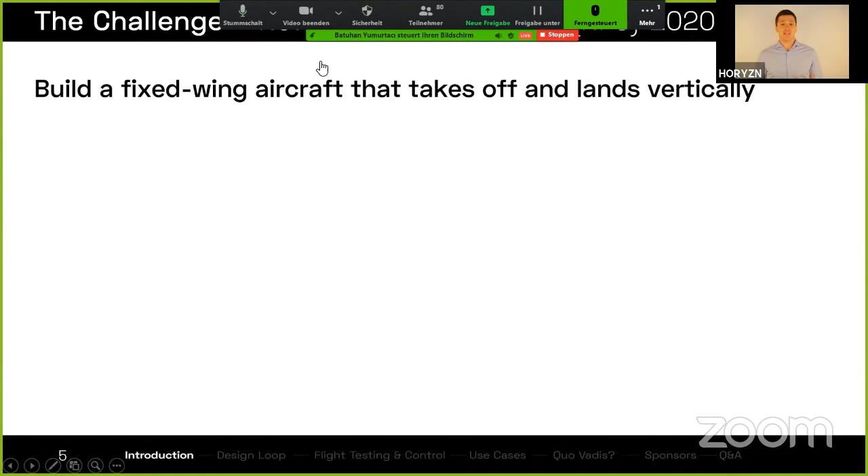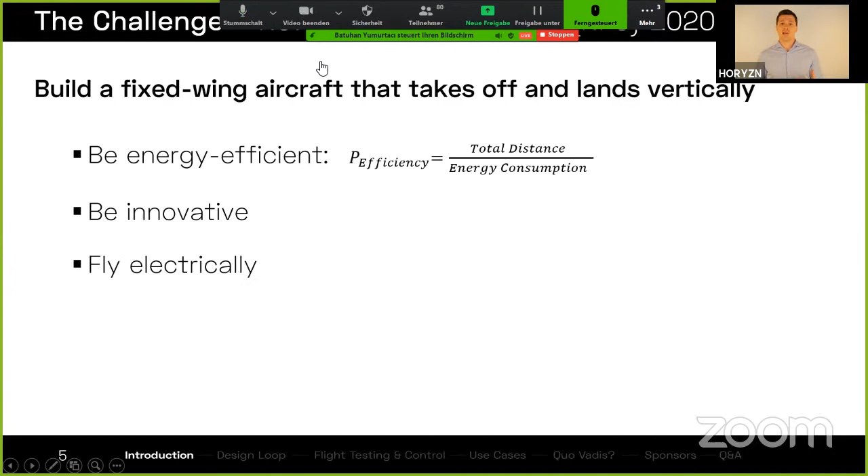Our story began about 8 months ago when we decided to participate in the NFC international competition. The task is to build a fixed-wing aircraft that is able to take off and land vertically. But our aircraft has to be energy efficient, and we get the most of our points for the flight performance - so the total distance divided by the energy consumption. We must also have an innovative design. We have to fly fully electric, and we must carry a 2-kilogram payload measuring about 1 meter. The competition will be taking place at the end of October.

The mission profile is quite challenging and includes taxiing, a 15-minute cruise flight with a minimum flight speed of 60 kilometers per hour, and also looping.

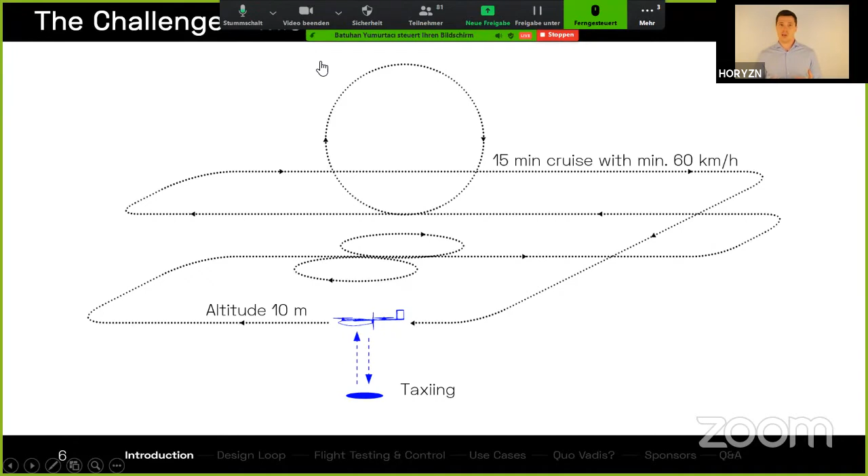So we put this team together. But who are we today? We are 29 bachelor, master, and PhD students. We are from 9 different nations. We are divided into 7 sub-teams. And we have one goal: to win the NFC competition.

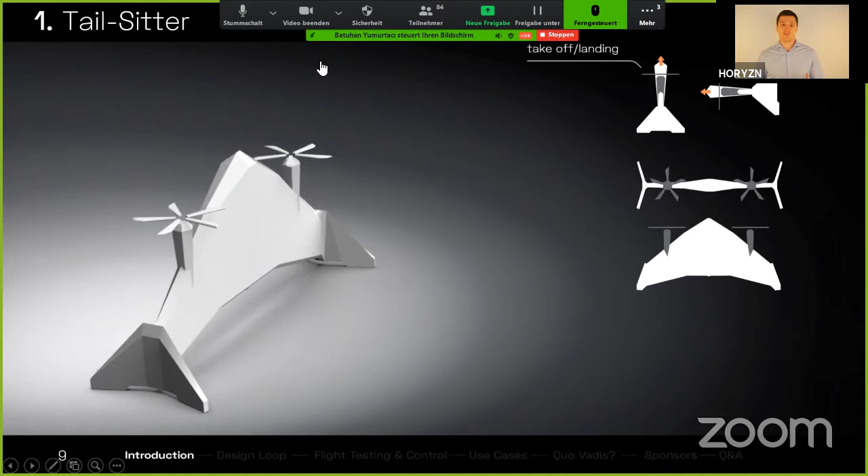So we started the brainstorming process to find an optimal configuration for our mission. We studied the following configurations: the tail-sitter, the tilt rotor, the kestrel, the tilt wing, the quad plane, and the quad plus tilt configuration.

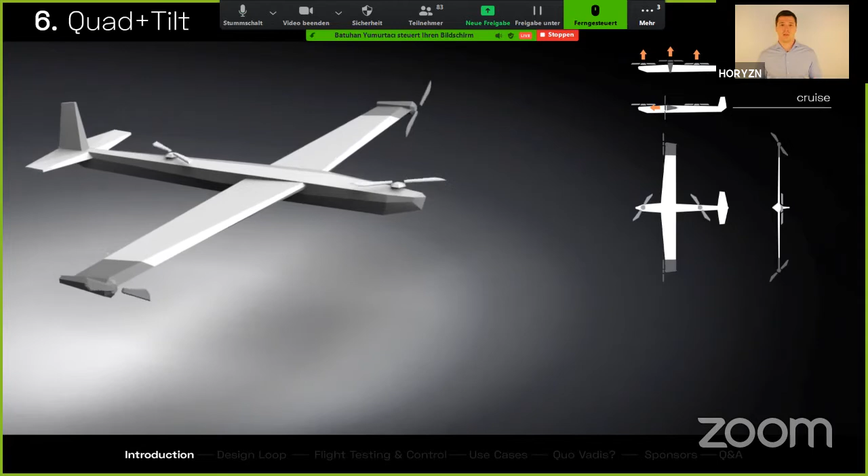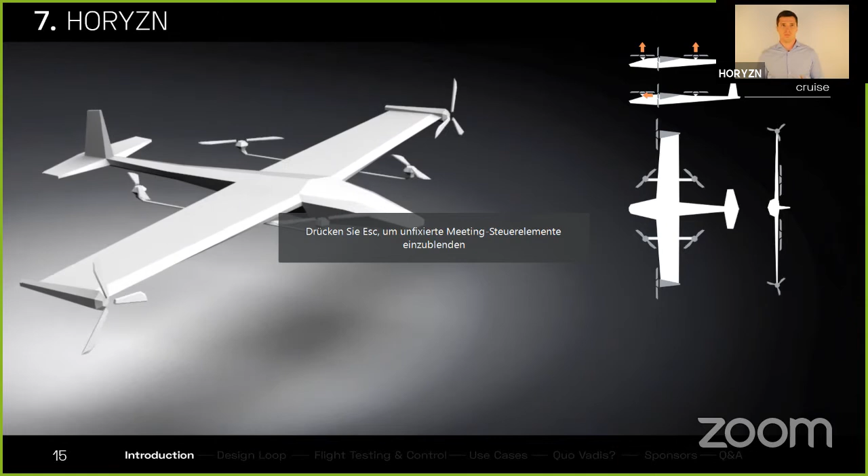From the quad plane and the quad plus tilt configuration, we derived the final concept. I'm proud to say that we finally found a configuration that we called Horyzn. Horyzn is derived from its design goal to be ultra efficient.

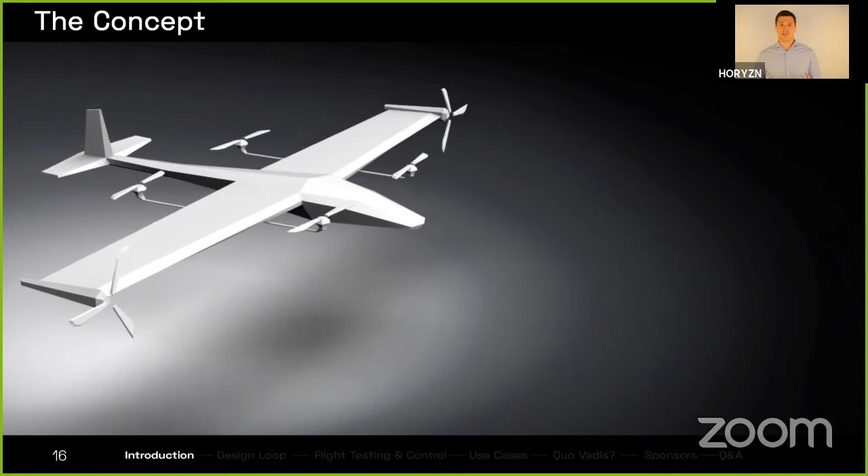It deploys 4 hover rotors mounted on booms at the wing and 2 wingtip cruise engines. This innovative configuration combines the simplicity of a conventional quad plane configuration with high maneuverability during the hover phase and high overall efficiency. The separation of the hover and cruise propulsion simplifies the system complexity, making it less complicated to design and safer to operate.

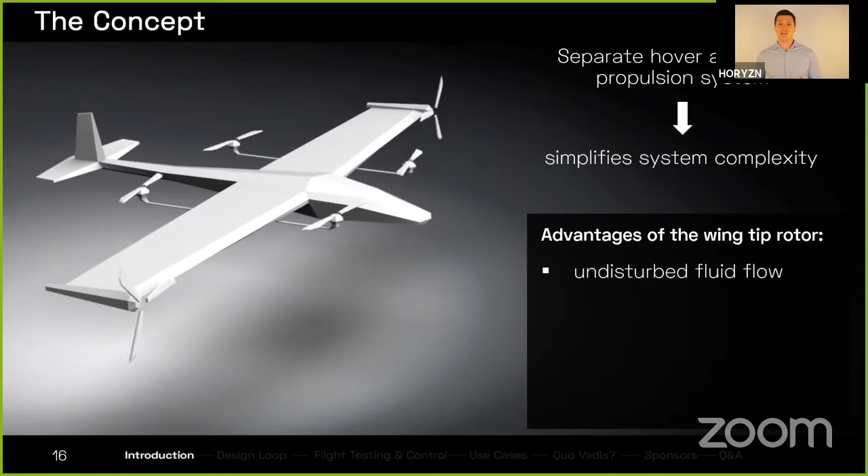But what advantages do we have with the wingtip rotors? Operating in completely undisturbed free stream conditions improves performance significantly. By interacting with the wingtip vortex, the proposed design partly cancels out the induced drag at the wingtip. Deploying differential thrust technology, high yaw authority during the hover phase is made possible. This enables precise hovering and a high level of control that other configurations cannot provide. And since the differential thrust technology is also used during cruise flight, no rudder is required.

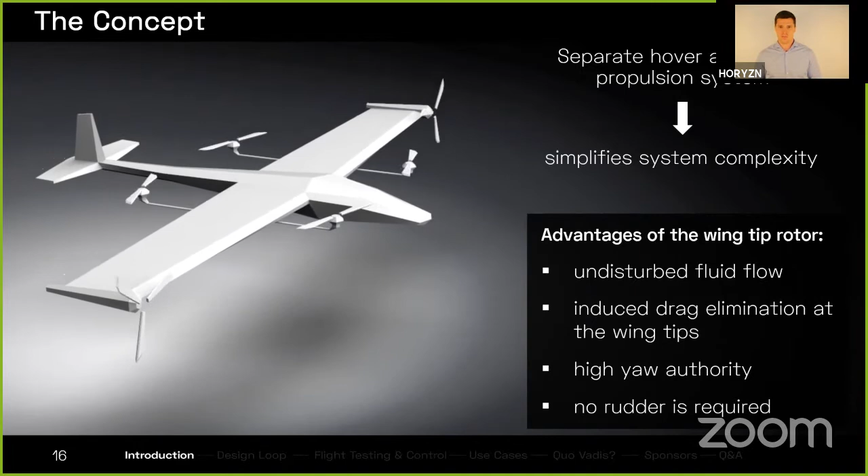So after we selected the configuration, we started the design process. But what does our design process look like, and why is it so special? To explain that, please welcome from the design loop team, Heitor Gardner.

Thanks, Balázs. Hello, everyone. So let's start with the design loop process - a quick introduction in the beginning into this topic. So the problem when we want to design an aircraft is that everything influences everything.

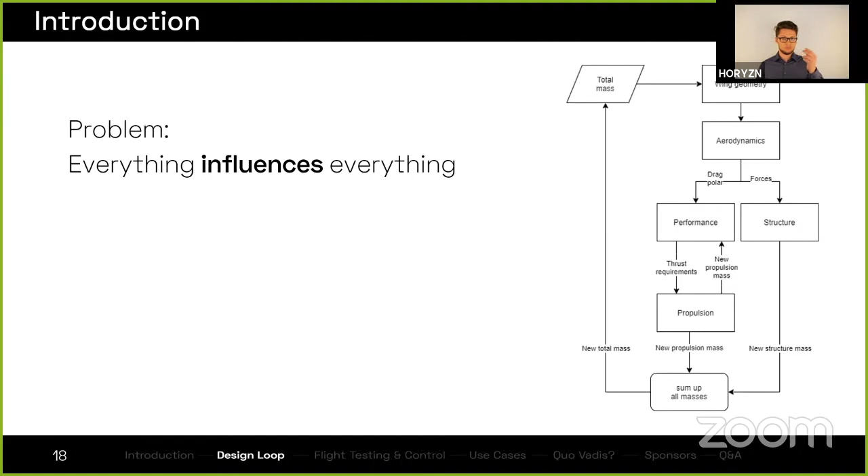As you can see, for example, in this chart on the right, we start with the total mass. And the total mass influences our wing geometry, which then influences our aerodynamics. Later on, for structure calculations, you get a new structure mass. When you choose a propulsion, you get a different propulsion mass. And when you add those masses up, you get something different than you assumed at the beginning. So you have to restart the process all over again. This is called an iterative design loop.

And this is what we implemented. Now I'll show you how we implemented it in our case. We start on the left side with our inputs. Our inputs are the high-level geometry of the aircraft - for example, aspect ratio, wing loading, and certain points of wing and empennage geometry - also our starting maximal takeoff mass, which is also kind of an output, that's why it's a circle there in the diagram, and also our mission segments.

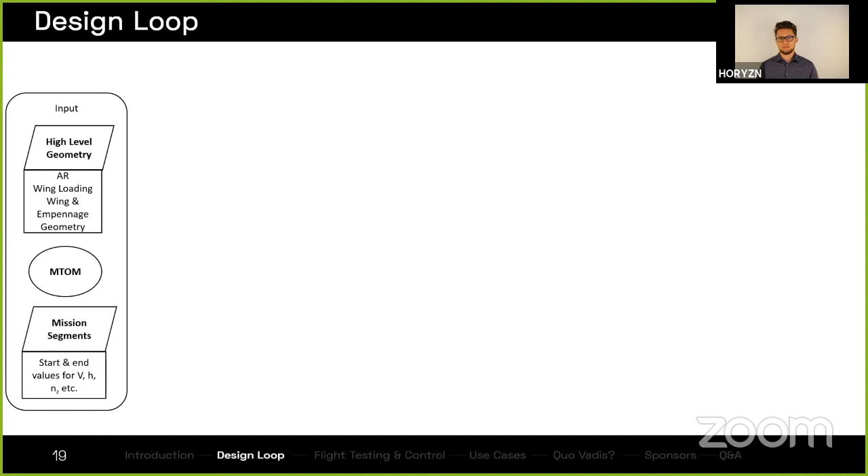Now into the design process, the high-level geometry goes into the geometry module, which is something specific for our case here. We get into that in a bit. And together with the mass, we go into the aerodynamics. The aerodynamics gives a drag polar into performance and propulsion, and also the forces into the structure.

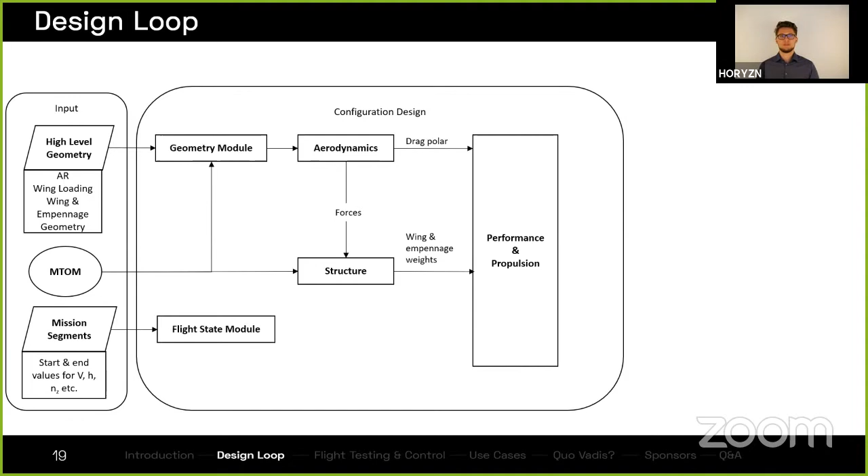And the structure gives us new wing and empennage weights. On the bottom, our mission segments go into the flight state module, which then gives flight states into the performance and propulsion calculations. There we receive a new propulsion weight, and we sum all the masses up and see if it converged. If it did not converge, we start the process all over again. And if it converged, then we have one converged configuration.

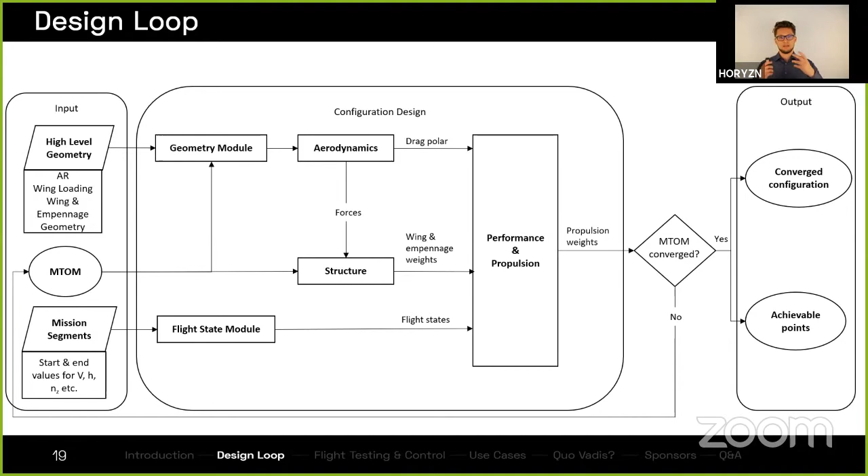And also we know how many points we'll achieve with that specific configuration, because this is actually what we want to optimize for. We want the maximum points as possible.

So let's go into depth into the applied technology here real quick. We use state-of-the-art software, for example the PAVA tool from Bauhaus Luftfahrt, which is a 3D aerodynamics calculation tool. Also, a big thing here, we use the CPACS from DLR, which is an XML-based parametric data exchange format. And together with that, we use TiGL and CPACS Creator, which is also part of that toolbox.

We also use the RCE program from DLR, which can do actually a lot of things, but we use it as our toolchain manager to implement our design loop.

So what's special about our design loop process is that the setup is modular. So we can model different aircraft configurations. We can model different mission types, and we can also optimize for different criteria. So what this gives us is a huge potential for future applications, for example different competitions or whatever the future might bring up.

Now let's go into the modules of our design loop. So we start here on the left with the inputs. And the first module is the geometry module.

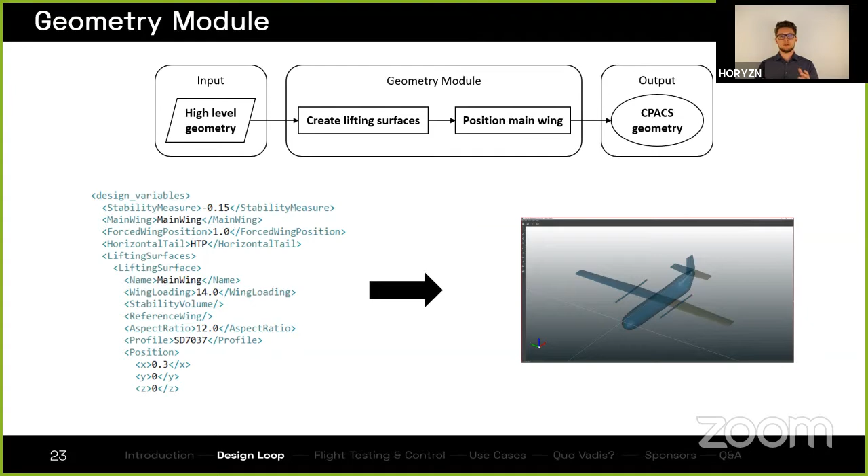Next module is the flight state module. So as input, we have our mission segments. For each segment, we have start and end altitude, acceleration, and so on. We also have our operating conditions, for example the flight box size that is actually given by the competition.

And inside the flight state module, a trajectory gets generated. And as an output, we have our flight states. So we know for each trajectory point, how fast we're flying, what's the acceleration, we know the flight path angle, we also know the time between two points and so on. So with that, we can actually do performance calculations.

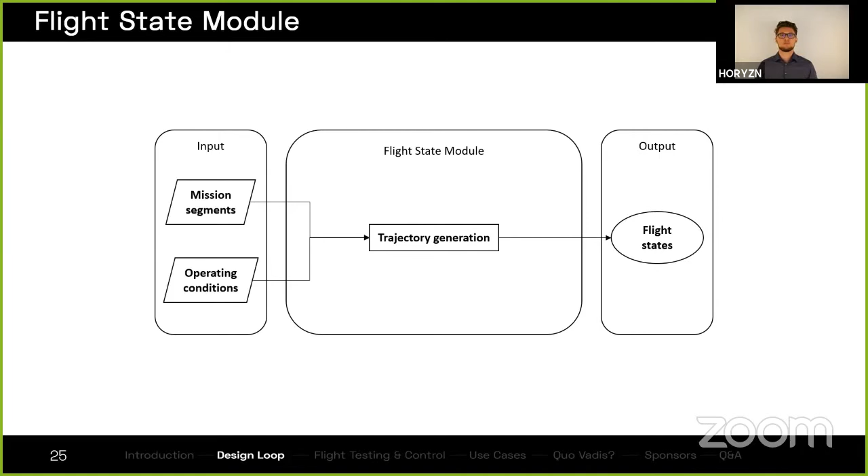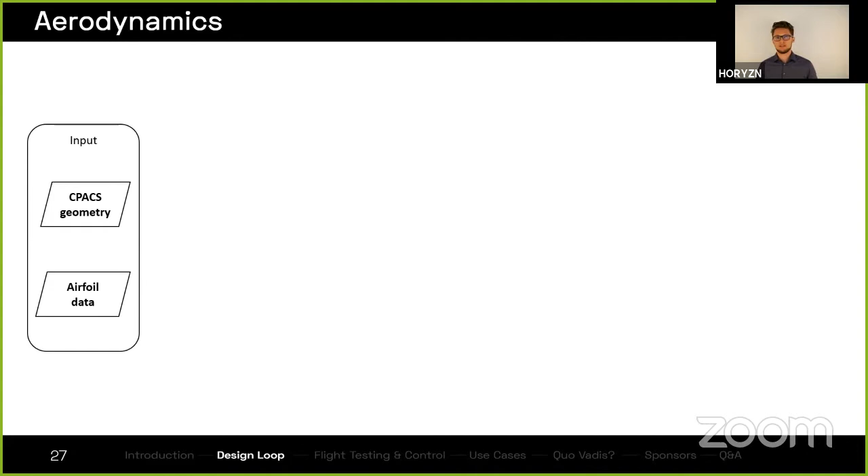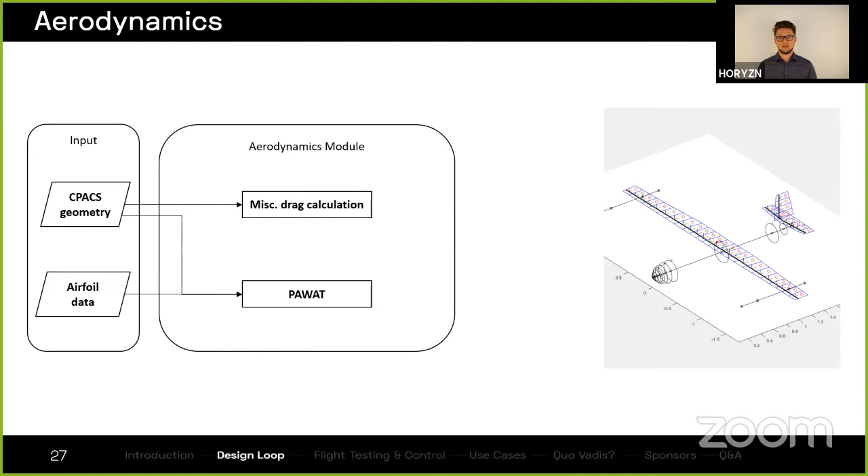Next module is the aerodynamics module. As an input, we have our CPACS geometry and also airfoil data in 2D polars. And inside the aerodynamics module, we calculate the miscellaneous drag. Also with the PAWAT tool, we calculate the 3D aerodynamics. And as output, we have our forces and moments.

We also have our trimmed 3D polars and our neutral point position. On the right, you can see a screenshot of PAWAT. This is how it looks like inside there.

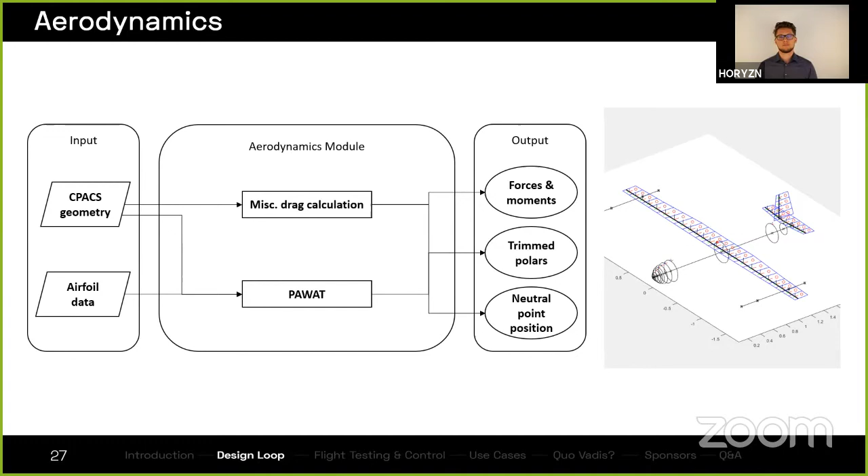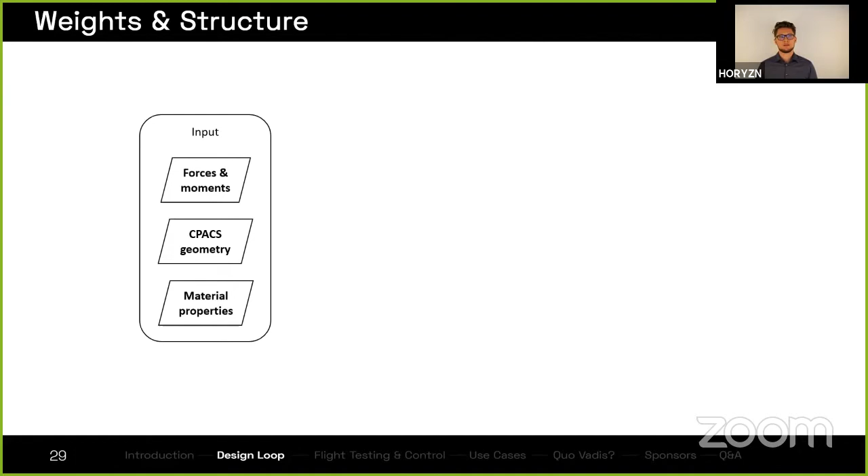So now let's go to the structure. The structure receives the forces and moments at the critical flight states, also the CPACS geometry and material properties. Inside the weights and structure module, we do two things. For once, we analyze the bending, and with that we size the wing spar. And on the other side, we do torsion analysis, and with that we size our D-box.

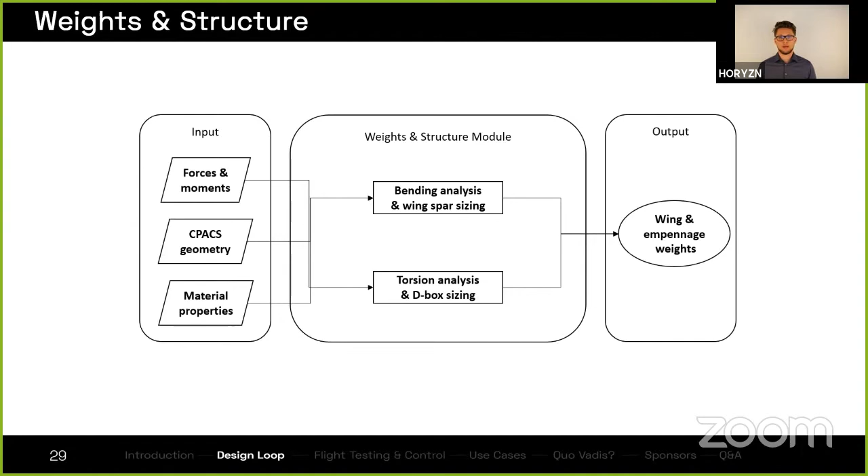So as an output, simply we have new wing and empennage weights. And after that, we go into performance and propulsion, which is actually the heart of our design loop. And for that, I happily introduce you, Barlas Türkilmaz.

Hi, Tom. So today I would like to talk to you about how we calculated our performance and propulsion modules.

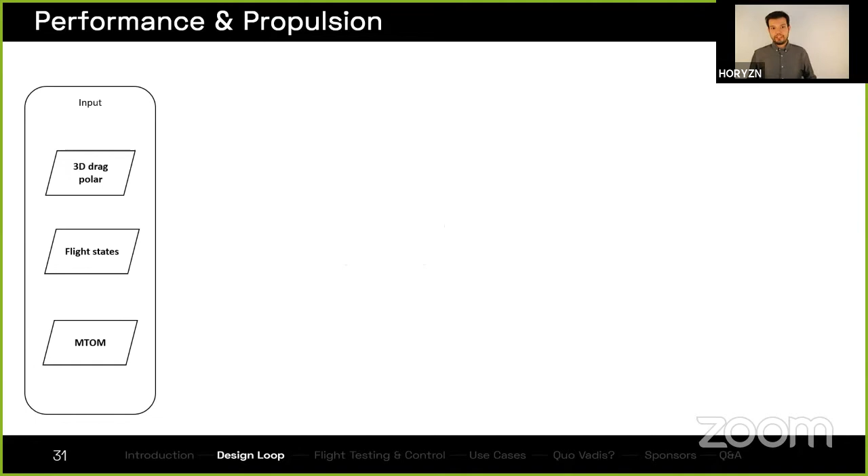So we start just like we did with every other module. We start with our inputs. We have our 3D drag polar, we have our flight states, and we also have our maximum takeoff mass.

With that information, we can calculate how much thrust we need to fly a predetermined mission that we get from the flight state module. And after we know how much thrust we need, we can choose the most efficient propeller that can deliver this thrust.

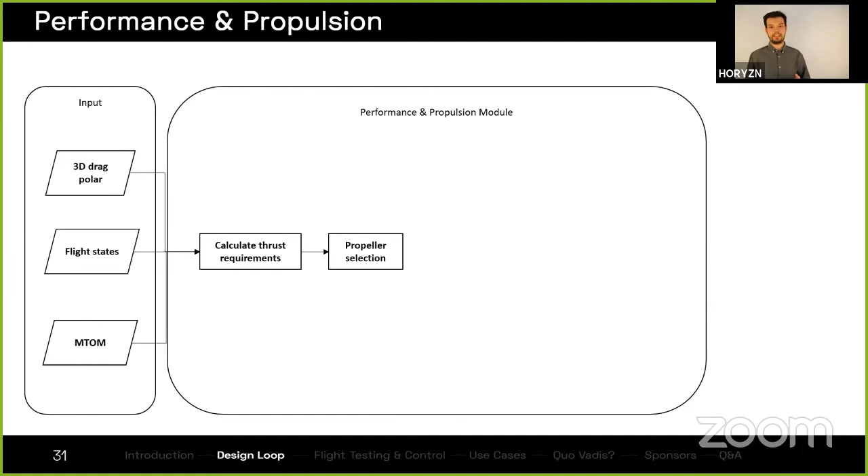And after we've selected our propeller from a large database, we then go on to select our motor, our cable, and our ESC, which can drive this propeller.

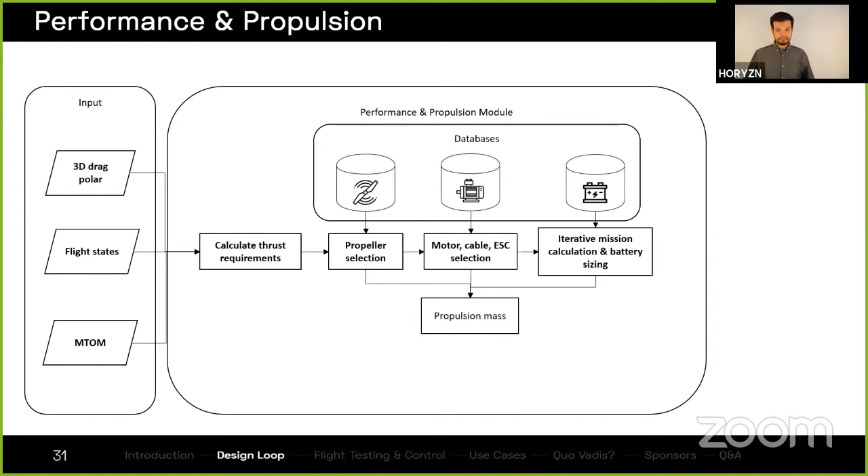And after that selection's successful, we need to size our battery with the amount of serial cells that we need. After we've sized our battery, we have our propulsion mass.

And after we know our propulsion mass, we need to check if it's converged or not with the previous iteration. If it has not converged, then we have to calculate our thrust again. And if it has converged, we know which propulsion system we're going to have for a configuration. We know its properties, its mass, CGs, and we also know how many points we can achieve.

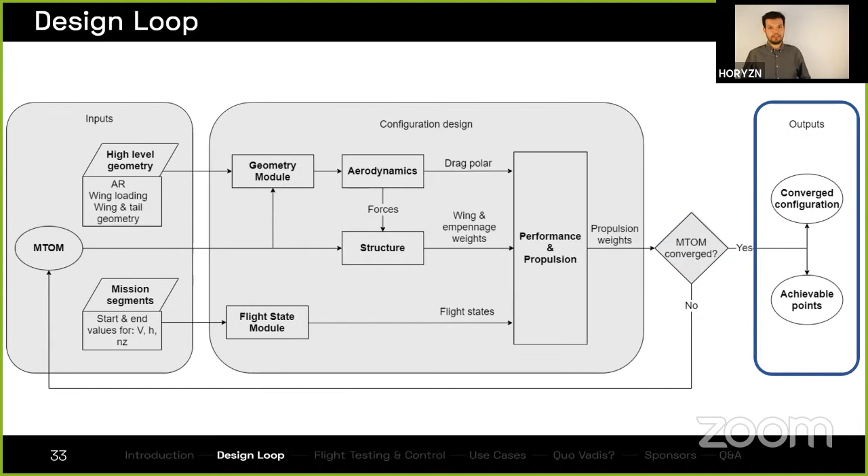So we're actually at the end of our design loop. We have to check if our maximum takeoff mass has converged. If no, we have to go back, as Heitor already told us. But if it has converged, we know how many points we can get from the competition, and we also know how our airplane is going to look.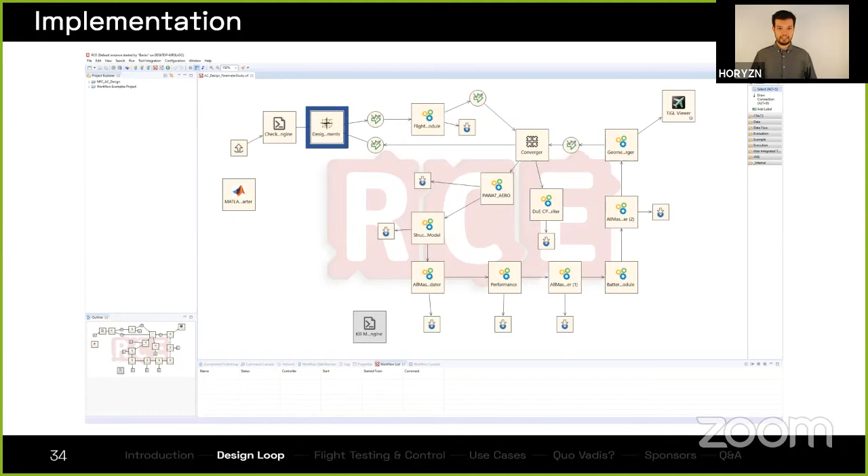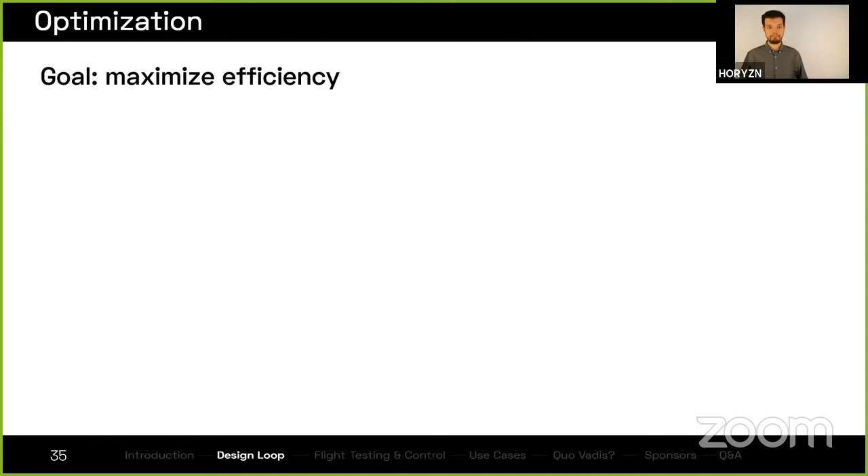So how did we optimize? How did we go forward with picking the best configuration? Our goal, as already mentioned, is to maximize energy efficiency. In our case, this is travel distance divided by energy. And to do that, first of all, we looked at which cruise speed we need.

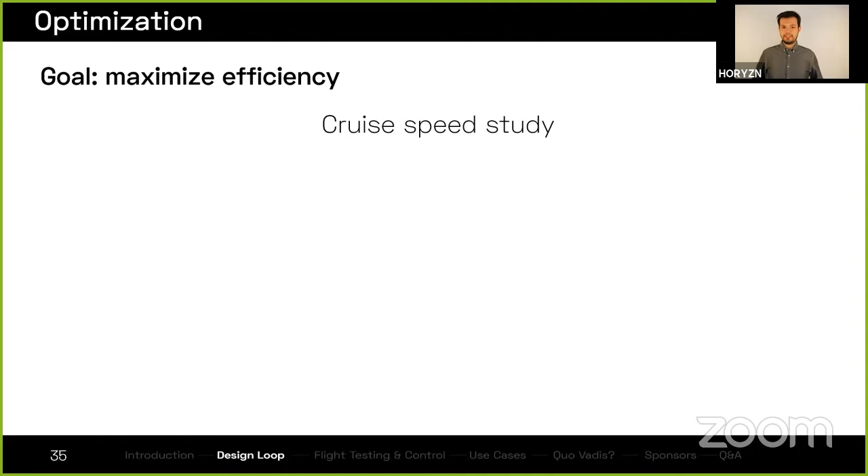After we've determined an optimal cruise speed for all flight states, we did an aspect ratio and wing loading study. So we wanted to determine how our wing looked like first. And then we did a taper ratio study. After that, we had an optimal wing geometry for a cruise speed.

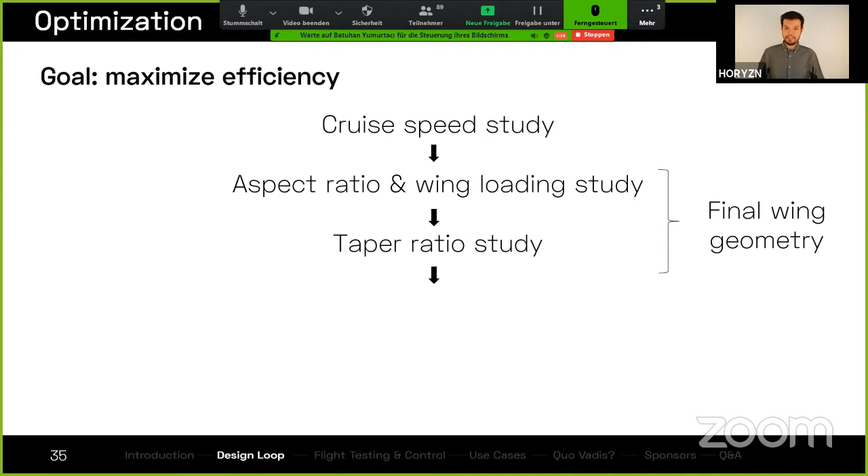And after we had our cruise speed, we went ahead and optimized the empennage. So how much does the aspect ratio have to be? What does the taper ratio have to be, and so on. And after we did that, we did a propeller diameter constraint study, and that gives us also an optimal propeller.

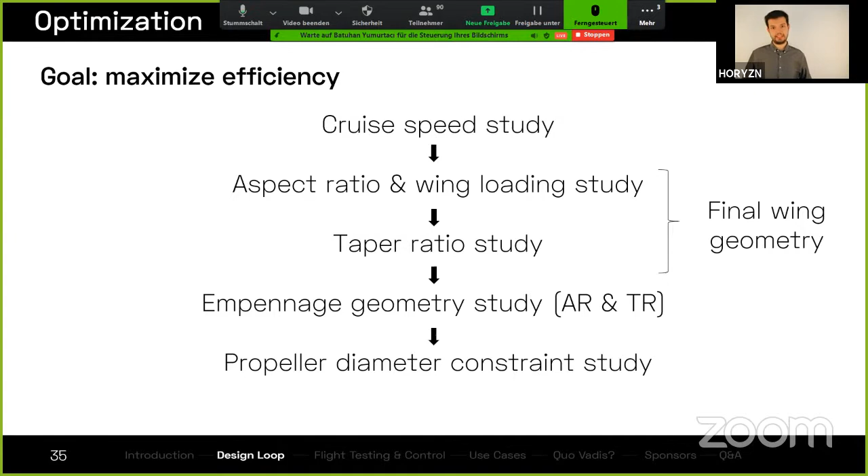So those are more or less the results that we got. We have a takeoff mass of almost 13.5 kilos with a wing loading of 14 kilos per square meter, an aspect ratio of 13, cruise speed of 20 meters per second, a stall speed of 12.3 meters per second, a total energy demand of 140 watt-hours, and 138 points.

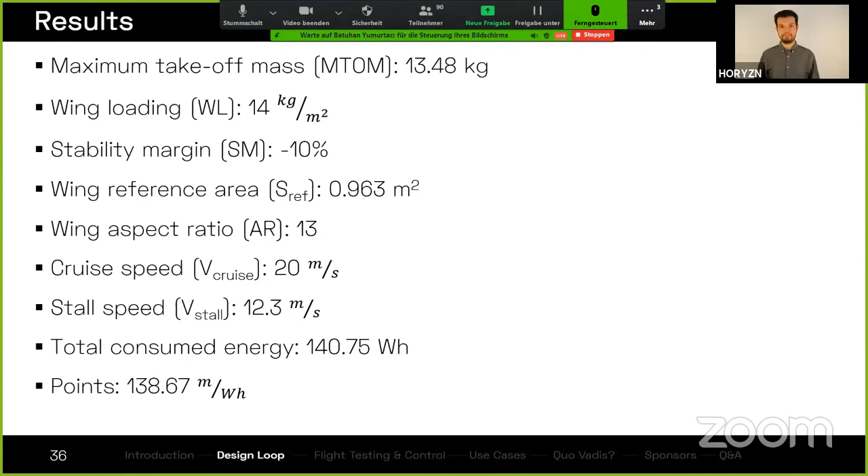And this is how it looks like in CAD.

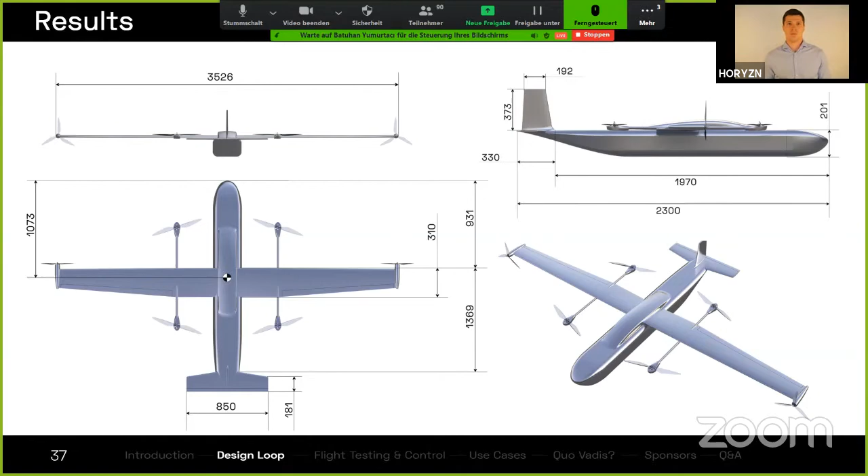So now we heard how we design our aircraft, but how we perform on the airfield and in the workshop. Our next speaker didn't have the opportunity to fly back to Germany due to the current regulations of the coronavirus, so he is now live from Turkey. Please welcome on the stage, Batuhan Yumurtacı.

Thank you, Balázs. Hello, everyone. I hope you can all hear me well. So today, I'm going to talk about our prototyping and testing process.

Our philosophy is to build fast and fail early. What this means is that starting from day one, we had our prototypes that we have been using as flying test platforms to gain experience, to identify the upcoming problems, and also to find and implement our own solutions.

Let me start by talking about our prototypes. The first prototype we have is called Frankenstein. This is also the model that we have conducted our first flight tests using an autopilot system. One of the main goals with Frankenstein is to check the compatibility of onboard electronics and also to learn how to conduct a flight test as a team.

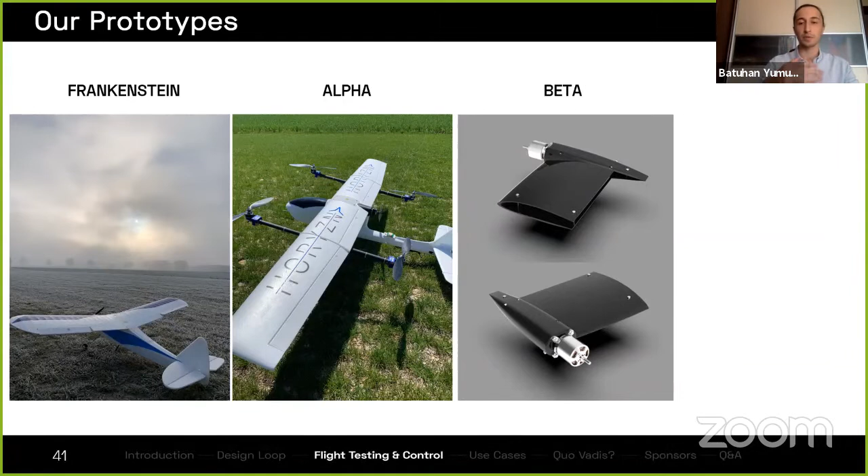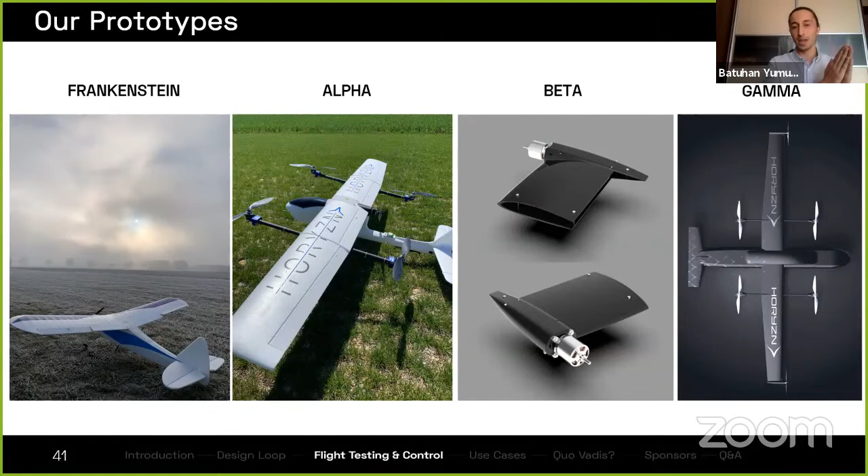The final aircraft we will have is called Gamma. For Gamma, we are going to use all the optimized parameters from Design Loop and the experience we have gained from our prior prototypes.

So how does a typical flight test look like and what do we do with our prototypes? We just don't go to the field and hope that everything works well. That's the reason why we call it a flight test rather than a flight attempt. Before each flight, we set our goals and go through the steps that we are going to follow during the flight test. We have our pre-flight briefing to bring every participant to the same awareness level.

During the flight, we have a standard procedure and we go through our test cards. After the flight, we have our debriefing round where we assess the flight, write down the problems we had, and also the goals we have achieved. Another important aspect about the post-flight is the data analysis. We get our data logs, we analyze them, and also compare them with our prior flight tests. Based on all that information, we go back to the lab and improve our setup.

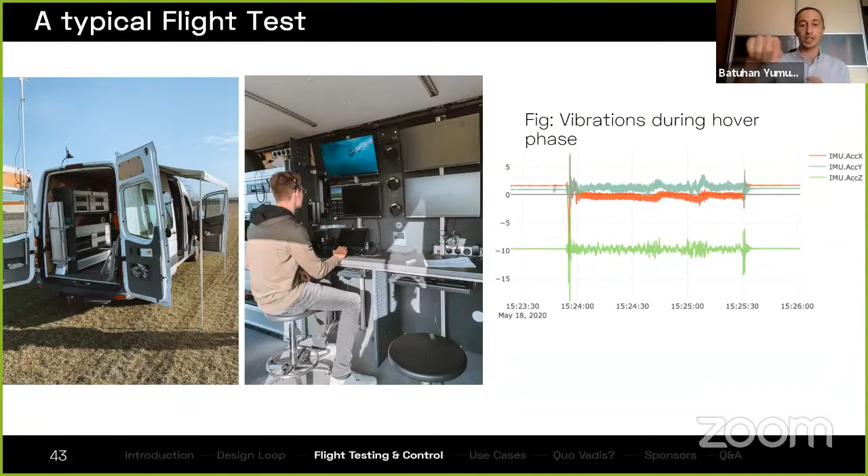Here you can see some pictures from our flight tests. On the left, you can see the van provided by the Institute of Aircraft Design. Inside that van, we have all the necessary equipment so that we can build our ground control station and have a secure data connection with the aircraft as it's flying. And on the right, you can see an example plot of our data analysis. For instance, this one shows the vibrations during the hover phase of Alpha prototype along each axis of the aircraft.

Before handing off, I would like to also mention the flight phases we have and how we fly with our prototypes. The first mode we have is hover mode. In the hover mode, we just perform the vertical takeoff like a common multi-copter. Then we switch to transition mode. In that mode, all the motors are active, thus the aircraft gains a forward acceleration.

Depending on the airspeed and after some threshold, the power is being transferred from the hover propulsion to the cruise propulsion. After that, we switch to cruise mode, and in that mode this is actually a typical fixed wing flight, and we just use the cruise motor and the control surfaces. For the landing, we follow the same procedure backwards, and in that case, instead of accelerating in the transition phase, we decelerate.

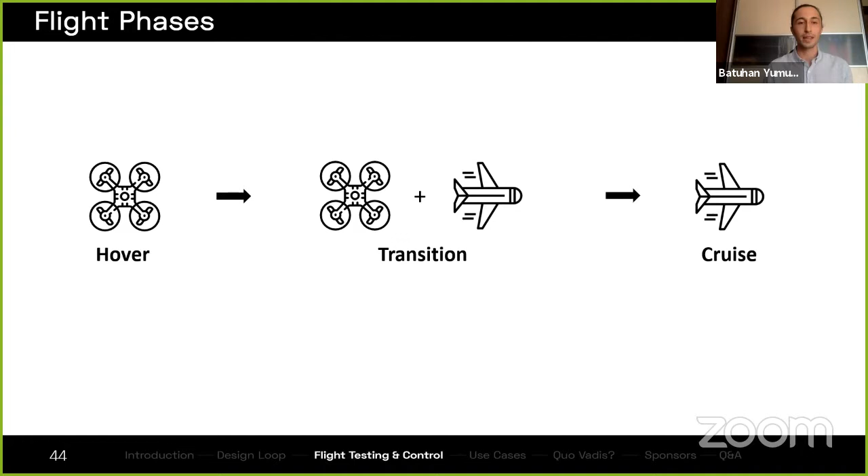Now we are going to watch a short video clip from our flight tests. And then to talk about our technical solutions, we will welcome Julian Main. Thank you.

Thank you, Batuhan, for introducing me. I'm going to tell you now some technical details of our planned gamma design.

In this slide, you can see what structure we will use. We will use ribs out of balsa wood along the wing profile. Attached to those ribs is a D-box out of carbon fiber, and this gives the whole structure its stability. The advantages of using a structure like this are high torsional stiffness, light weight, and low building effort.

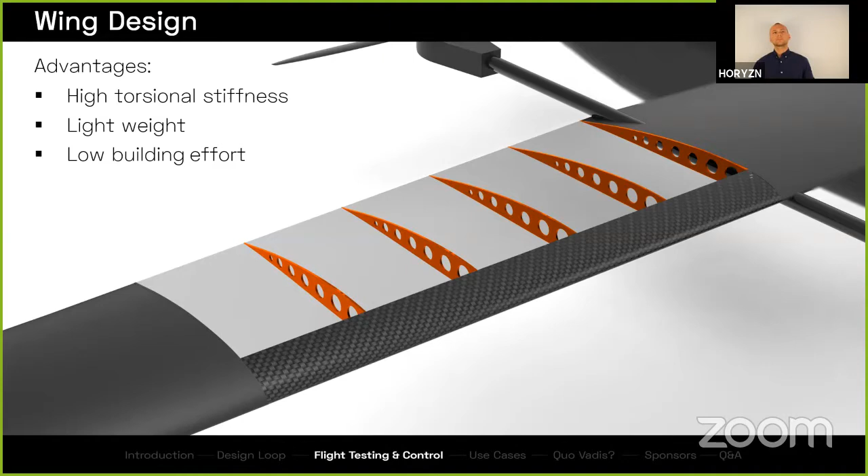Now I'm going to talk about the fuselage design. There you can see that we use some connectors in the edges, and between those connectors are carbon fiber layered boards. But one problem which we have with those connectors, if you 3D print them, is the danger of getting too heavy.

For example, if you use a radius of 50 millimeters for a connector like this, you get a mass of 1.5 kilograms for all 4 connectors, which is too much for a plane designed for efficiency. So one solution is to manufacture those connectors out of carbon fiber, and then you can save around 1 kilogram of total mass. The advantages of a fuselage like this are high stability and light weight.

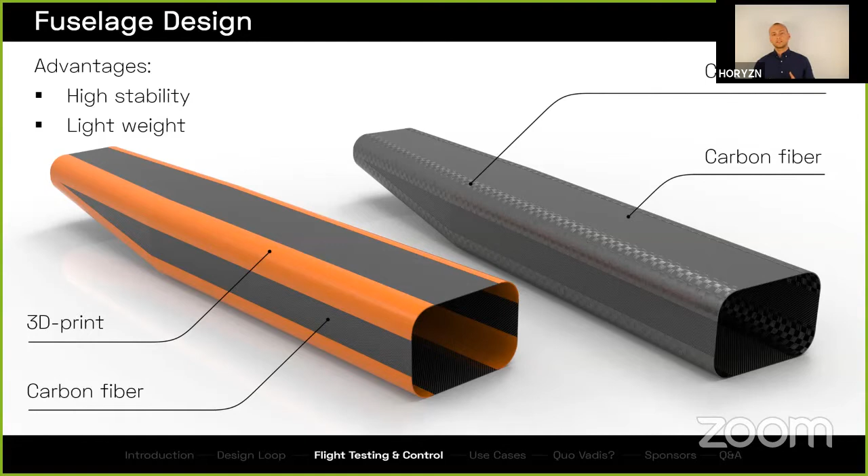At one point, we asked ourselves whether it may be more efficient to taxi with an electric actuated landing gear, which means attaching an electric motor to the rear axle, because we have a taxi distance of around 80 meters.

So we listed for ourselves the pros and cons of using such a mechanism. The advantages are, for example, that we would get innovation points for the competition, the total energy consumption would be way lower, around 10 times, and noise reduction on ground would also be better.

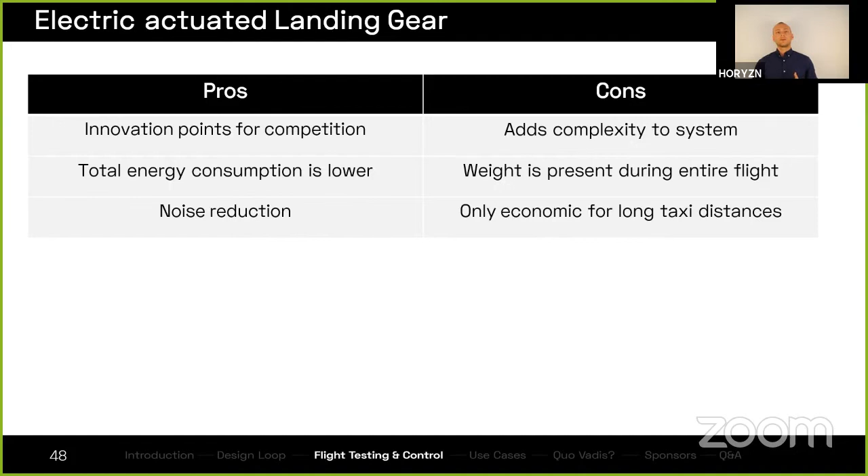But compared to the disadvantages, which are the added complexity to the system and the weight that is present during the entire mission, you can also say that such a landing gear is only economic for longer taxi distances. So we concluded that the advantages are only relevant for aircraft driven by fossil fuels, which is not the case for our design. I found a quote which sums everything up.

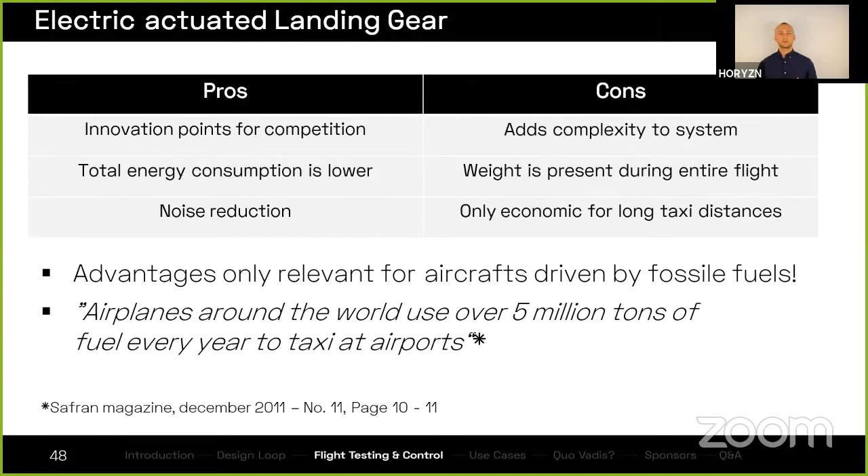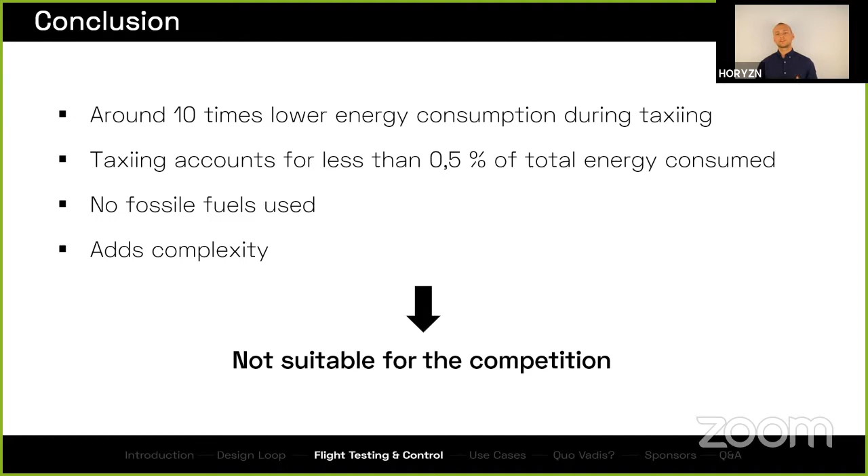Airplanes around the world use over 5 million tons of fuel every year to taxi at airports. So in a nutshell, we are way more energy efficient, around 10 times, like I've already mentioned. But we only have 80 meters of taxi distance in total, which is around 0.5% of the total energy consumed in the whole mission. We do not use any fossil fuels, and the complexity added to the whole system is way too overwhelming. So we will not build an electric actuated landing gear.

Another question we asked ourselves, because you saw the design earlier with the 4 hover motors: how can we stop the uncontrollable spinning of the 4 hover motors during cruise flight? So we thought about reducing the drag of the spinning inactive propellers by aligning the propellers with the flight direction. The requirements are a low mass and a small amount of mechanical parts that could potentially fail.

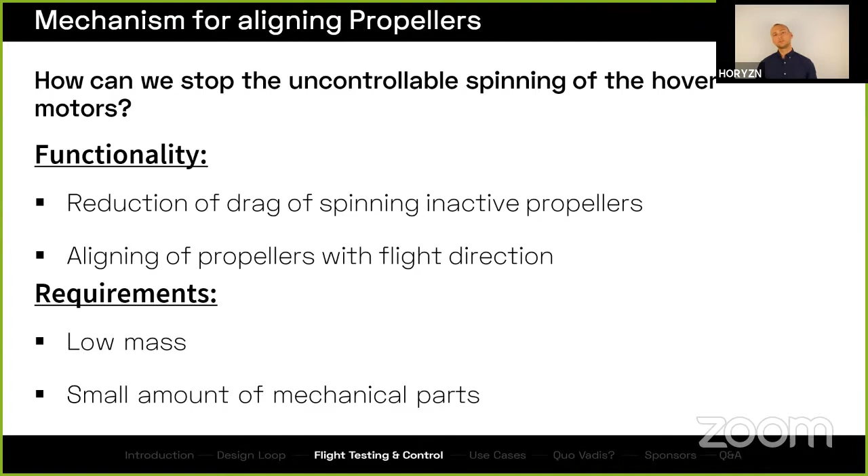In this slide, you can see our solution illustrated. Long story short, I'll sum everything up for you. There is an infrared sensor in proximity to the rotor, and the sensor can detect whether a white stripe, which is attached to the rotor, passes by the sensor or not. If the rotor passes by the IR sensor, a signal is generated, which is passed through a microcontroller on which the RPMs and the position of the rotor are calculated.

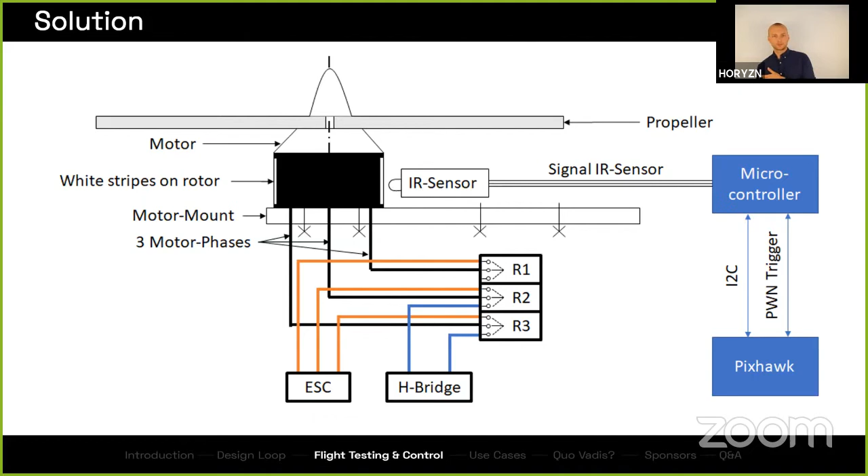Our flight controller, the Pixhawk, gives some kind of trigger signal to the microcontroller, which then starts its logic, and the relay circuit mentioned can switch between normal operation mode and holding operation mode. With this solution, we try to have as few mechanical parts as possible and a low additional mass, but we also have to say extensive testing is necessary because we want to prevent unwanted states, for example holding the rotors during hovering.

So those were some technical details, some of many, I have to say. Thank you for your attention. And now back to Balázs.

So we heard about our aircraft design process from Heitor and Balázs, and Batuhan and Julian have shown our prototyping process, how our prototyping process looks like. But which real-world problems could we solve with our aircraft? From the business team, please welcome Sonja Dluhos.

Hello, as already said, I am part of the business team, and in the business team we are analyzing a whole variety of different possible use cases for our configuration.

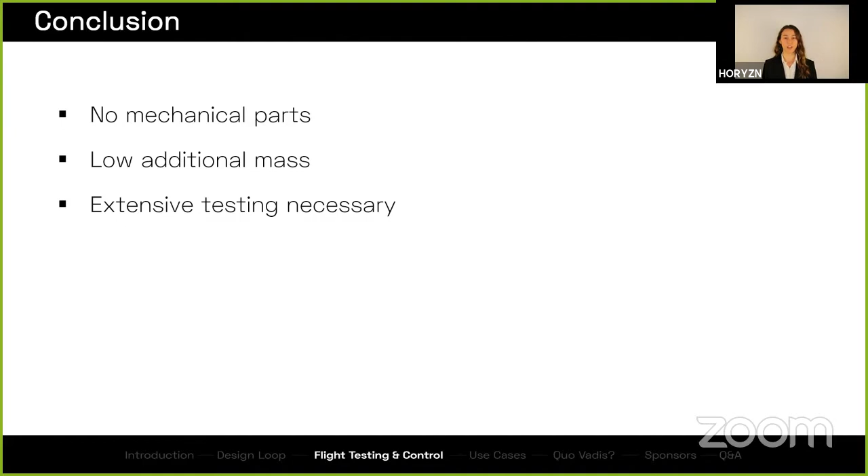One of them would be the organ transport, the shore-to-ship transport, or the defibrillator transport. As we do not have that much time today, I will only be talking about the defibrillator transport.

The defibrillator is a device used if somebody has a cardiac arrest, which means the heart stops beating. So let's take a look at the current process.

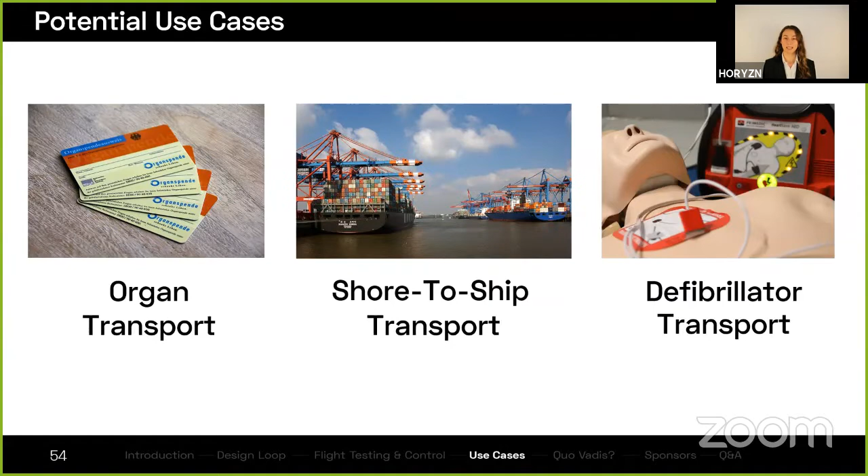Right now, if a person has a cardiac arrest and you are a bystander, you should immediately call 911, or in Germany 112, and then start doing CPR. The control center will then call the nearest ambulance and the ambulance will come to the scene. That whole process takes about 9 minutes until the first shock can be applied.

The control center also notifies persons called first responders. Those are first aiders who have voluntarily signed up, for example via the smartphone app Mobile Retter.

Those first responders are really important for this use case, because you cannot use the defibrillator if there's only one bystander. You need two bystanders because you shouldn't stop doing CPR to apply the defibrillator. It's also important to know that the first responders do not have a defibrillator with them. That's why we should use UAVs.

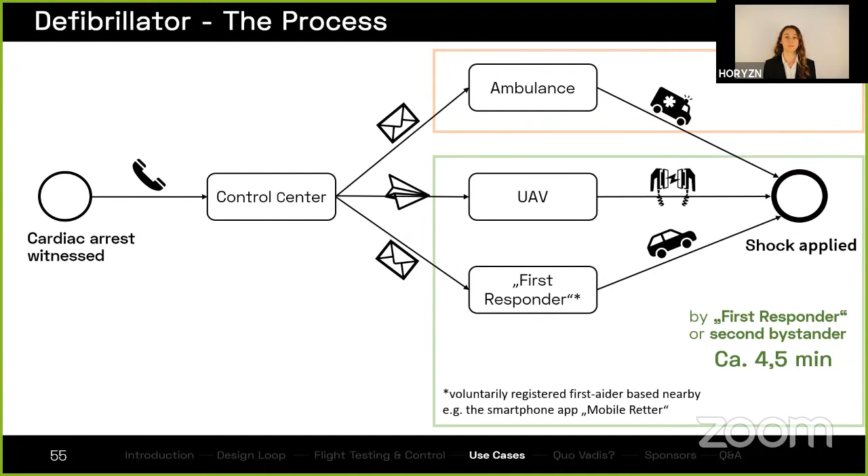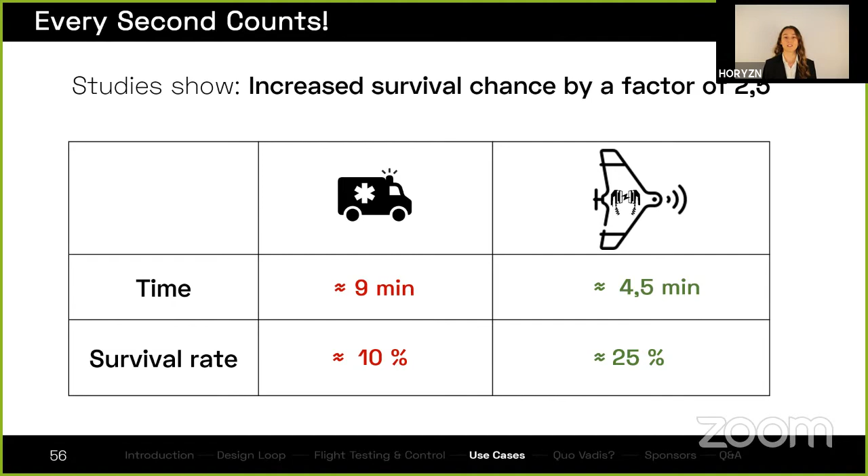UAVs would bring the defibrillator to the scene so the shock can be applied. By using UAVs, we would cut the whole time in half, and by cutting the time until the first shock can be applied in half, we would add a survival chance of about 15%. Now let's take a look at the total addressable market.

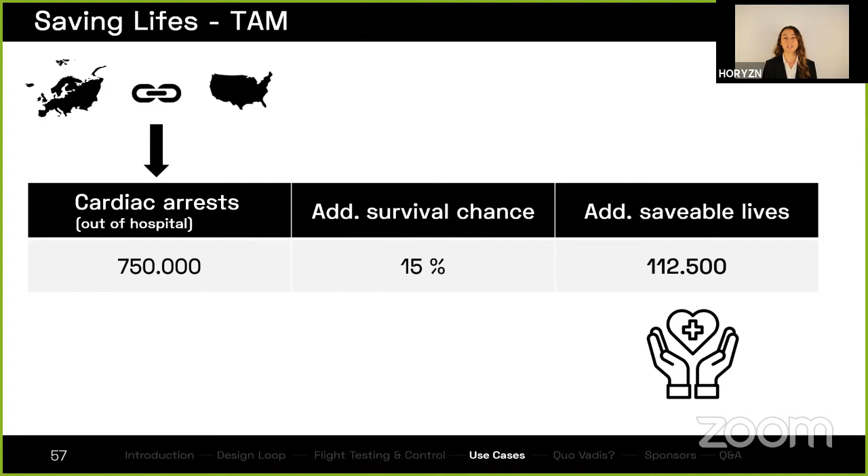If we add up the out-of-hospital cardiac arrests from Europe and America, we get 750,000 out-of-hospital cardiac arrests per year. If we multiply that with the added survival chance, we would be able to save 112,500 lives each year.

Now, it's difficult to put a price tag on lives. We have an institute called the ICER, which evaluates new medical innovations and determines when a product would be profitable on the market. The ICER suggests that one quality-adjusted life year would be worth $100,000. A person who has survived a cardiac arrest where the defibrillator was used has about 4.8 years left to live. If we multiply that all together, the total addressable market would be $54 billion.

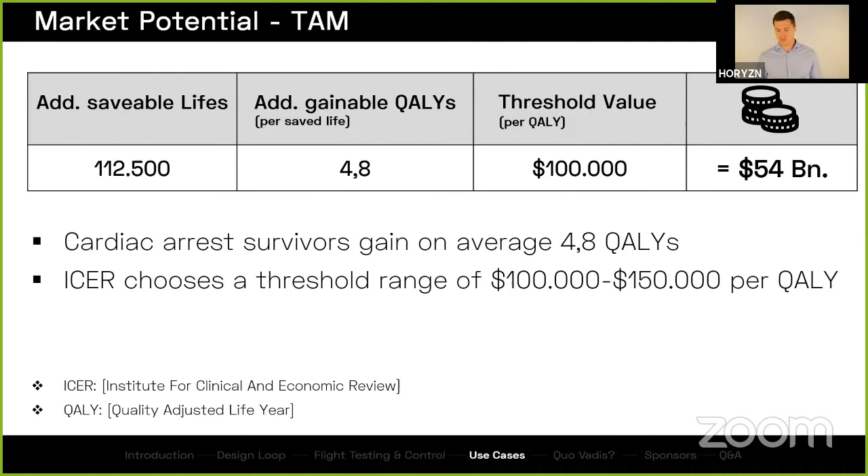Our short-term goal is to collect further experience and know-how in developing fixed-wing UAVs. We will compete in a larger competition next year. This will make us ready for our long-term goal, which is to develop a UAV for a specific real-world application. To make this vision become a reality, we will need you.